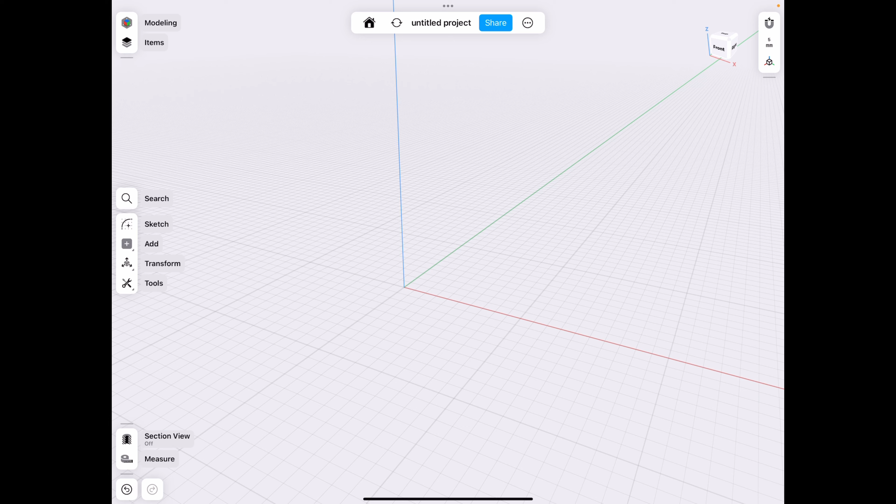I recently uploaded a grid and sphere tutorial, and I was inspired by that to make an eye tutorial. While it's similar, it's also very different. So let's go ahead and get right into it.

Select the top plane there on the top right square. Click the sketch menu, and select the circle.

Sorry, I'm already really tired. I've been working all day, but I really do enjoy making these videos because they're really fun.

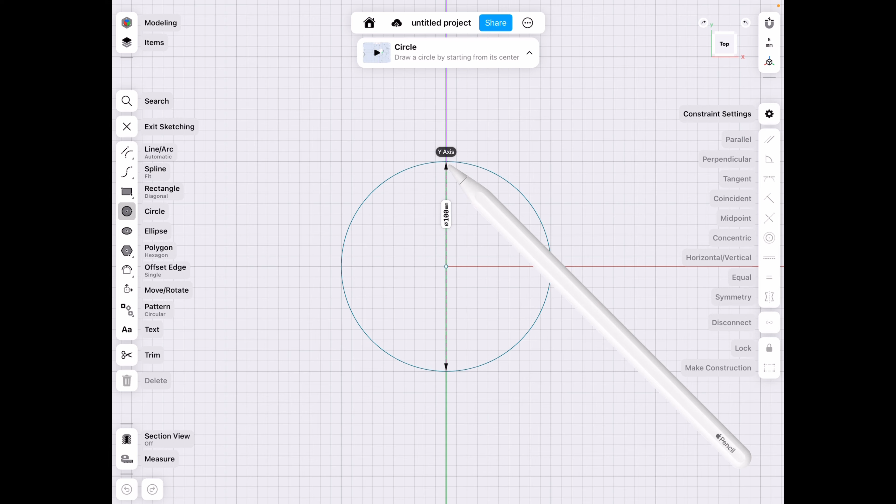So let's go ahead and do the circle. Let's make it an even 100 to make it easier to work with. Then for the center of the eye, let's make it an even 50, and then 25 for the retina.

Now that we have that, we can simply go to Tools, Revolve, and select all three of these and revolve them around the y-axis to make our sphere, the initial sphere.

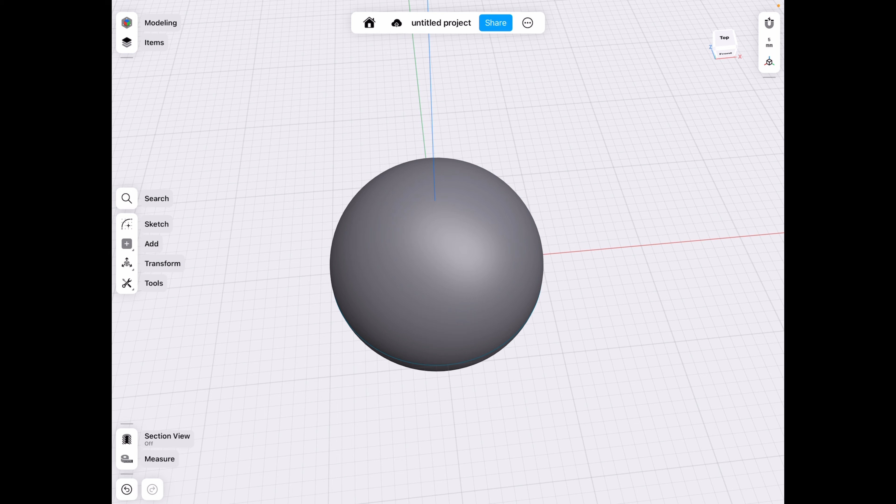Sometimes people would project that circle for the inner balls. What I'd like to do instead, because I have 3D printing in mind, is go to the top face again, click the section view, and then extrude first the center one, make it a new body, then do the same on the outside one and make that a new body as well.

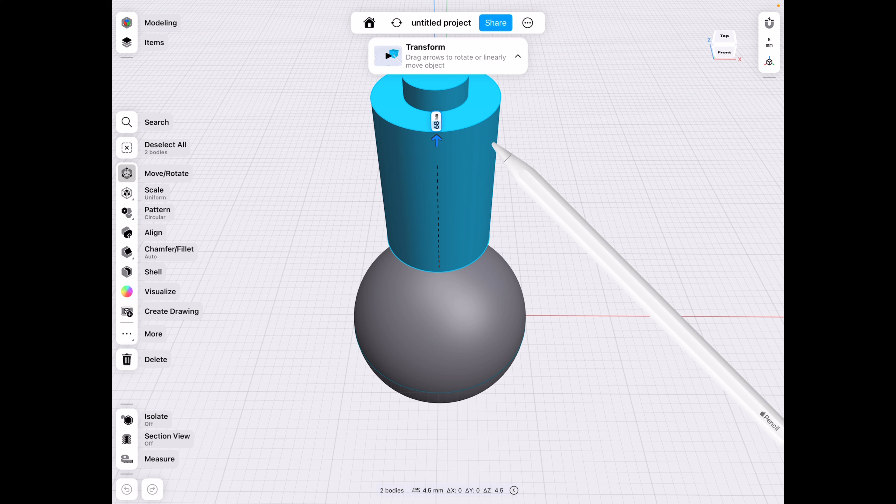Then turn off section view. As you can see, we have these two cylinders now, and for the moment we just have the sphere and the two cylinders, and they're kind of colliding.

So what we need to do is Tools, subtract from the sphere these two cylinders. The subtraction is the blue one, the purple is what we're subtracting from. For your settings, make sure you have keep bodies selected.

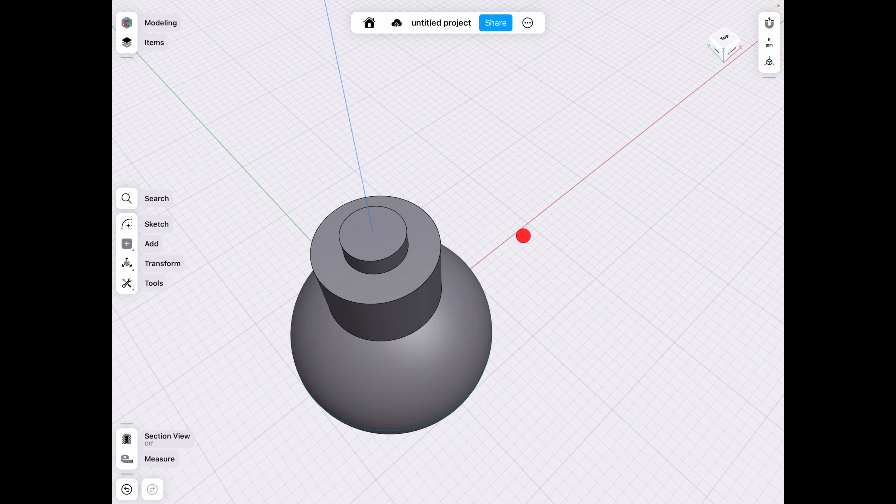That's what I usually do because I like to go in later and delete whatever is necessary manually instead of having it automatic, since very often I might save these pieces for reference.

So for the moment, we need to go to Tools, Replace Face, select both of these faces. Make sure you double click that second face, and then use our sphere as the guide.

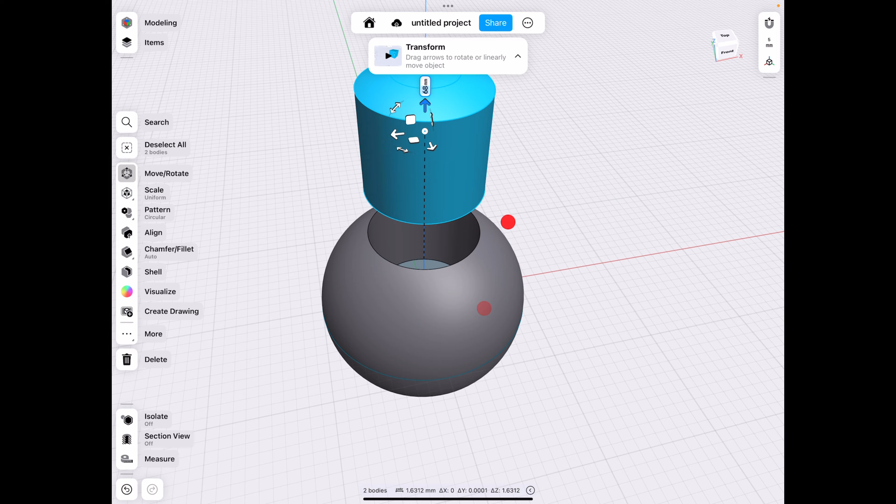Now we have these three pieces, and as you can see they are separated now and subtracted. So if you're 3D printing this, you can make them on the same machine but in different filaments, for example. Just for our reference, we also want to go in and change the color.

Let's make this a blue eye and a black inside as usual. You can basically make this any way you like.

But one more thing I want to add before we move on to make patterns on the eye: let's go back to the top face, section view, and we have our sketch here. We can offset the main circle by a little bit, let's say 2 millimeters.

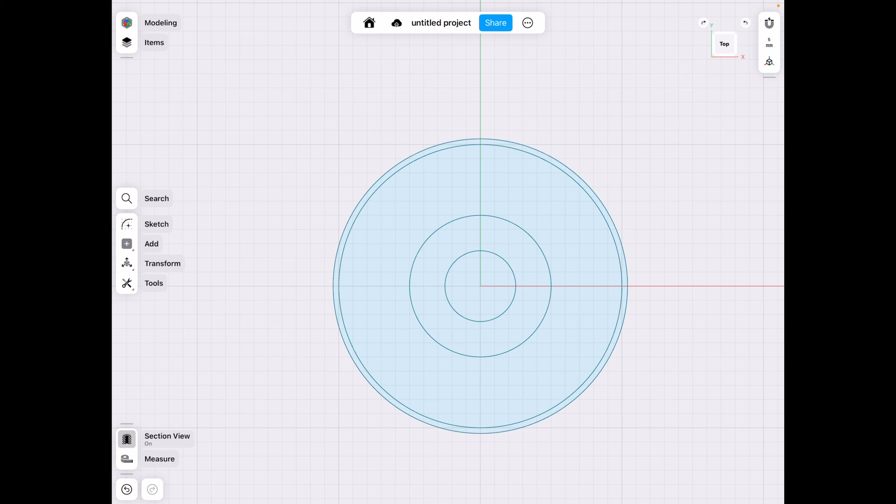Then go to Tools, Revolve, and we have to select all of them, because if you select only the edge, it won't like it. It's not letting us because we have to hide the bodies first, so let's do that, then Tools, Revolve all of these around the y-axis again.

So we have another sphere. Let's turn off section view and unhide our body.

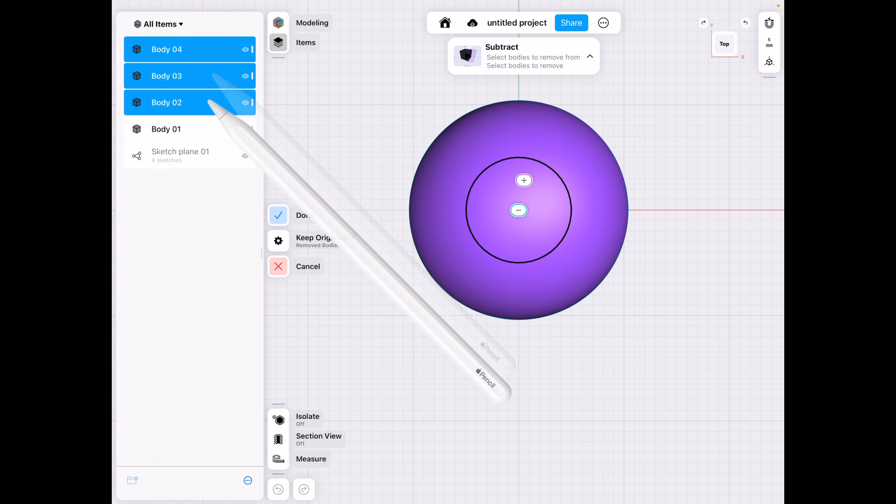So what we're going to do now is change this color. Actually, before we change the color, why don't we go Tools, subtract from this body these three bodies. Click Done. Then we go in and change the color of this to, let's say, white and transparent to about 10%.

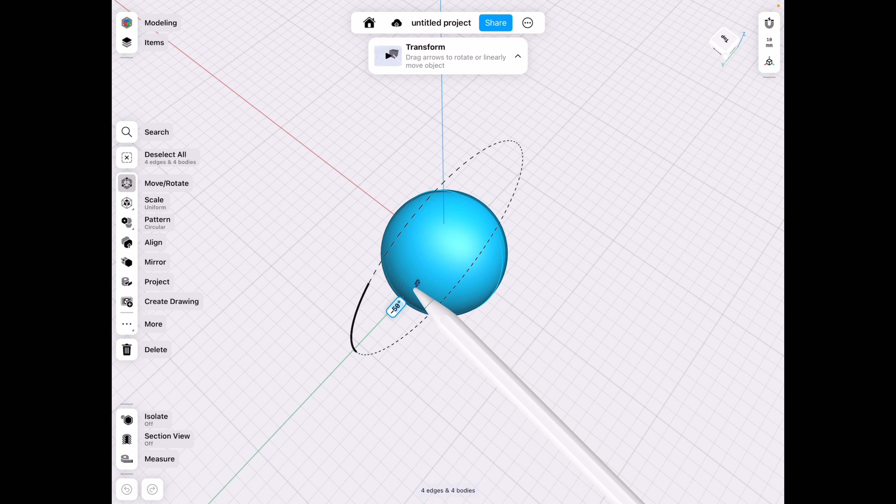Let's try 2% to make it slightly more realistic. This gives us that shiny edge when you're in visualization. If you go here and look at the light, let's turn this by 90 degrees and go into visualization so you can see for sure. You can see it does have an effect, because now it's like looking through glass. There's these kinds of things to consider when designing in Shapr3D—the light reflects slightly different, which makes a big impact in certain situations. So we're going to hide that for now.

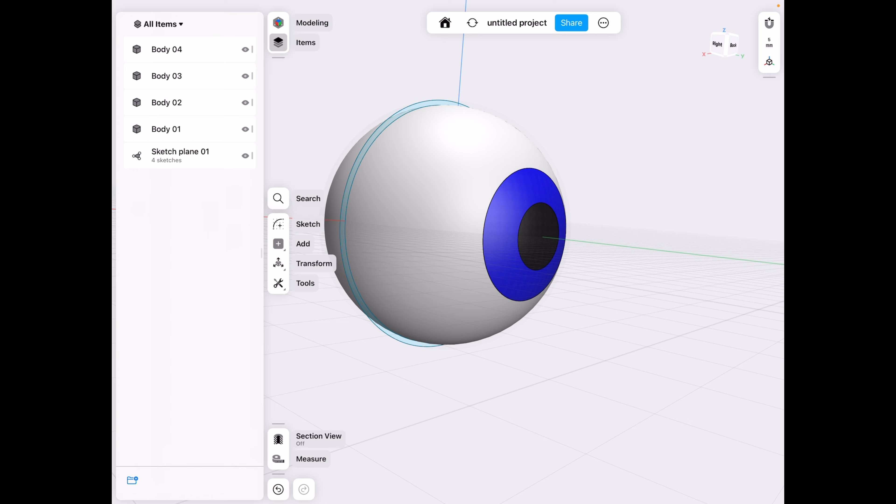We need to go on the top face again. Actually, we revolved it, so we need to change sides. The top is there, so we revolve it back by 90 degrees so we can work at the top again. Next, we click section view.

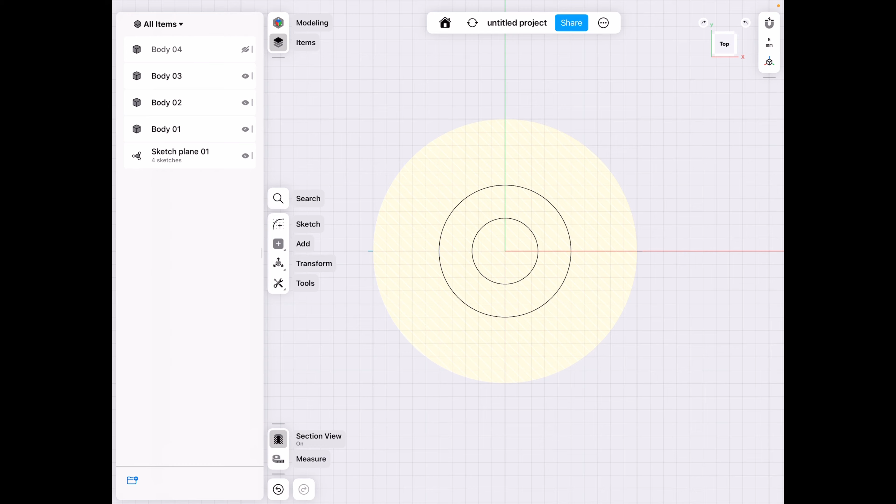We can go in and on this face sketch, using splines or lines. I'm just going to draw an arc here and lock these two into place. I'm going to change the dimension here, let's say to 60. It's going to be like an iris shape.

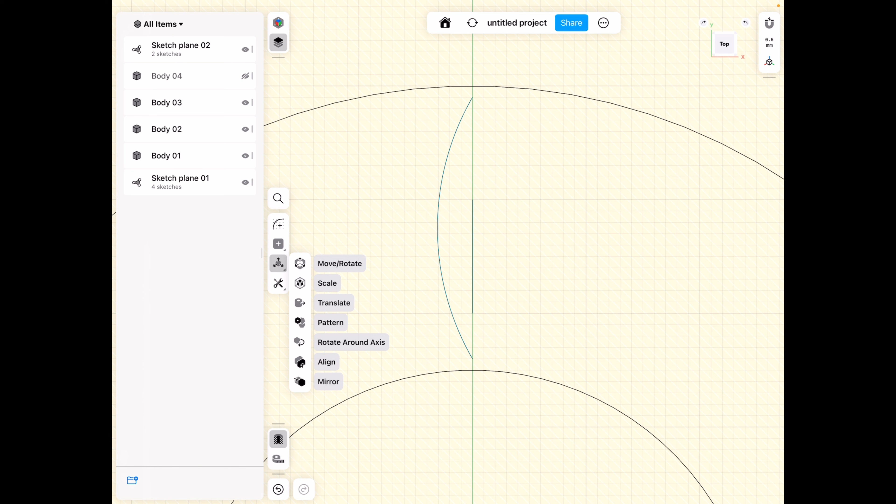I want to just mirror this to the other side instead of drawing it again. I'm going to choose transform mirror, select this line, use that center line for our mirror plane, then delete it after. So we have this edge, and we can go to transform pattern, select both of these, make sure circular pattern is on, then auto align in that circle. Let's go around by 360 degrees, and we want about 25 of them, maybe 27, or let's try 30. That's pretty good, so done.

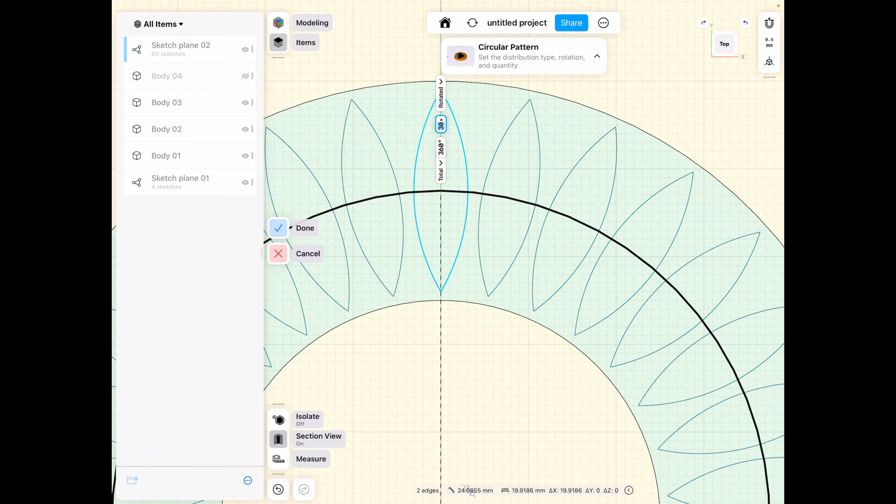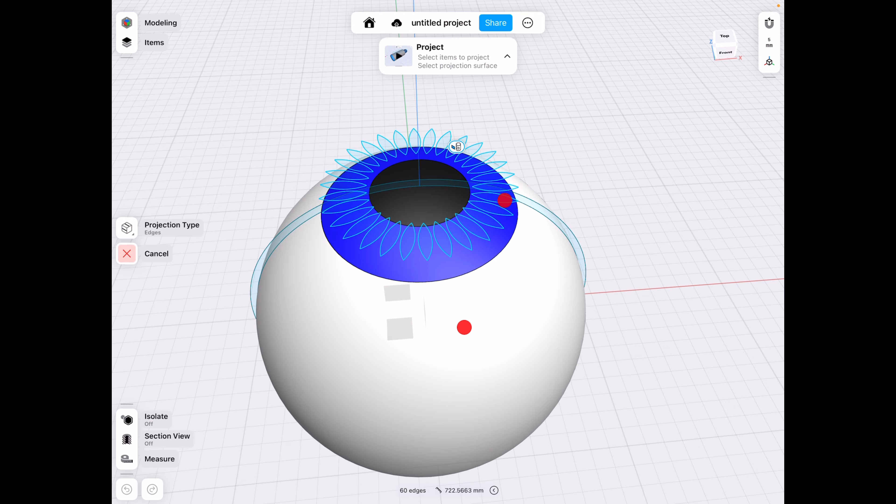Instead of extruding these, we want to actually bring this up with the move tool. Turn off section view so you can see what you're doing. So it's about right there, 50 millimeters. Then we're going to click more and project onto this part of the eye, and click done.

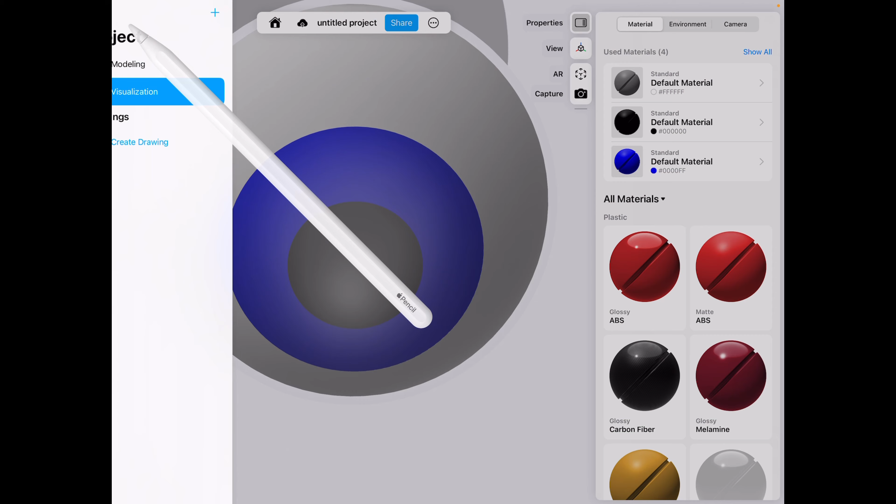Now we can hide our sketches. As you can see, once we unhide the other body, this is now a much better looking eye, except that you can't tell in here that it's different without the body lines. So what we can do is go and hide our upper face so it's not in the way, and select all of these.

This is one of those times where there's no real workaround—you have to select all of them manually, but it's not too bad, at least not when it's done.

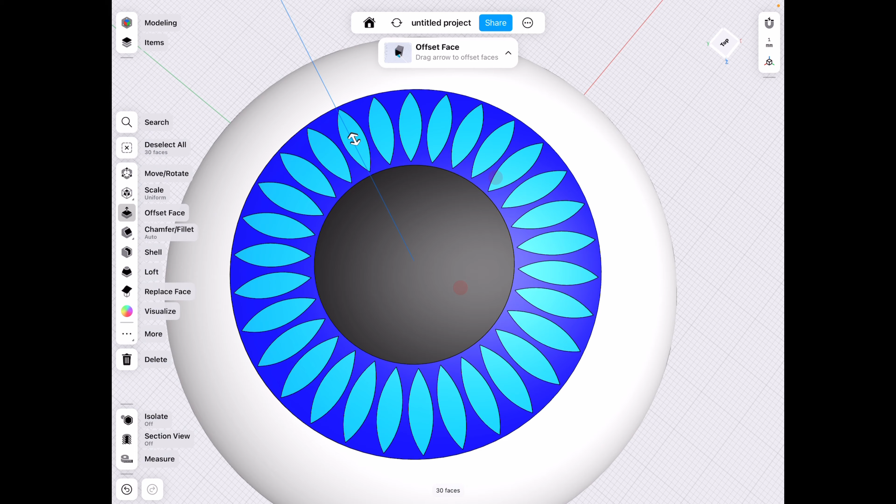Then we go to visualize, and we can change the hue of the blue just a little bit so you can have a separation. Then you turn on your other piece and go back to visualization. Now you can see we have an eyeball.

There's obviously a lot more you can do, a lot more designs you can interpret, but this is just to show you how to get that process started, and I hope it helps you. All right, I'll see you guys in the next one.